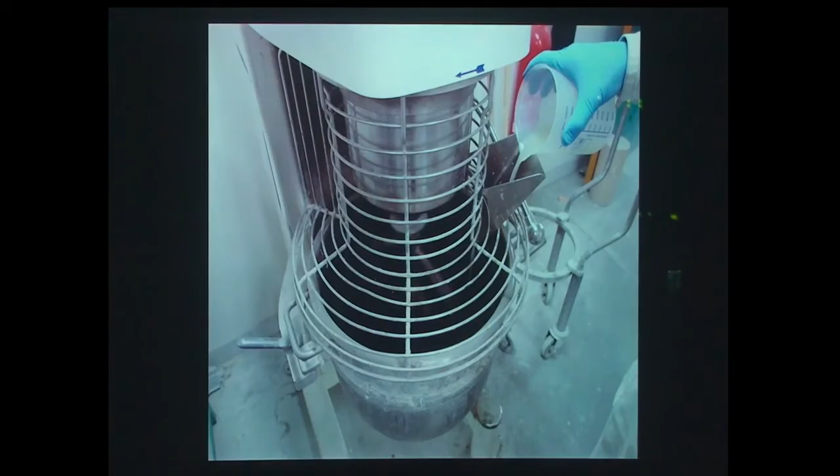So it gave birth to this, and to this very rough prototype made of fiber reinforced concrete. In fact, you assemble the cells in the way you want, and you obtain different concrete lattices. We worked on that in partnership with the Lafarge team, and ultimately we wanted to achieve this kind of component, but based on a voxelized strategy.

So you will ask, okay, why doing this? Why are you looking for this kind of light frame, I mean lightweight structure?

I'm not really an ecologist. Let's say, or either I am one, or I am not an ecologist, or I am a really radical one, because in fact I would love to have all the wild animals everywhere around, etc. So, in fact, I don't like parks. I don't like gardens. I don't like all the flowers that are selected. I just like nature. I would just love to be surrounded by wilderness, wild animals and trees and things like that. I never go in parks. I have never visited any parks in Paris. I'm living there for 20 years. I find this really boring, actually.

So this is why it's difficult, but if I am an ecologist, it might be a radical ecology proponent. In any case, if you look at these numbers, at these figures, it's quite shocking.

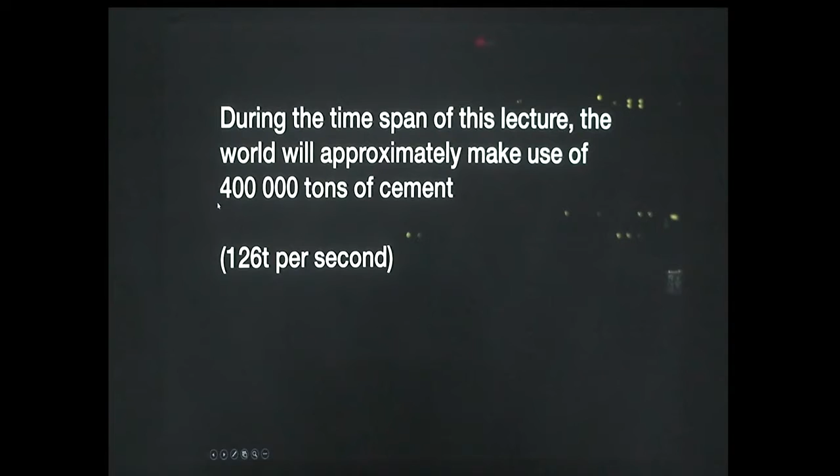And during this lecture, we will approximately make use of 400,000 tons of cement, which is 126 tons per second. So in fact, if in the 60s, making this kind of architecture was a matter of fanciness, it was really about style. At the moment, we don't have any choice.

We cannot be in a stylistic approach of architecture anymore. Because when you build that, you have to keep in mind that in another part of the world, it might definitely kill some animals, at least, and more often some people. There's no innocence anymore. The age of innocence is definitely over, let's say. And I think that architects should think really seriously about that. Fanciness might be criminal at some point.

So we have no choice in trying to make things lighter. And it's not a matter of aesthetics. It's just a matter of survival at some point. Even if I don't agree also with this kind of apocalyptic scenario, but I cannot go into the detail about that now.

So anyway, in the past, many people tried to build a lightweight structure. Gaudi did that, but I don't like arches, I'm not such a naturalist. I much prefer this kind of work by Shukhov, for example, or this kind of space frame invented by Alexander Graham Bell, who, by the way, is also the inventor of the telephone. So this guy is really fascinating. He gave birth to two of the major inventions of the 20th century, actually.

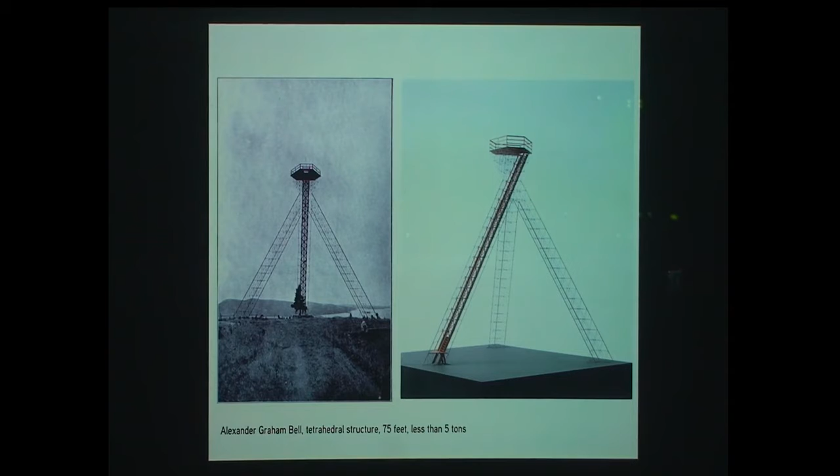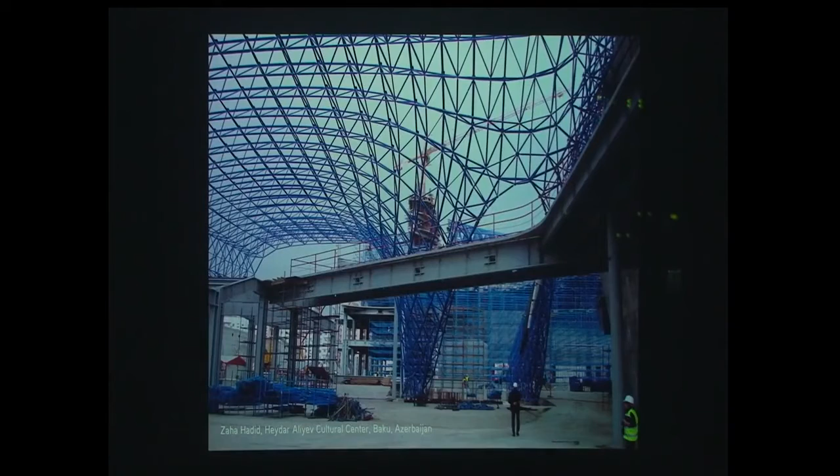In any case, this is what I'm interested in. But I want to do that not in steel, but with new materials, with concrete, for example. If I take a look at such a building, I'm much more interested in what is under the skin. It's a very Miesian approach of architecture at some point. It's very much about construction rather than about the way the architecture looks at the end. So I'm interested in that, but not in steel. I'm basically interested in this in a more advanced way.

So basically, I believe that the real challenge in architecture in terms of construction is to make the intrinsic geometrical and topological complexity associated with optimizations buildable.

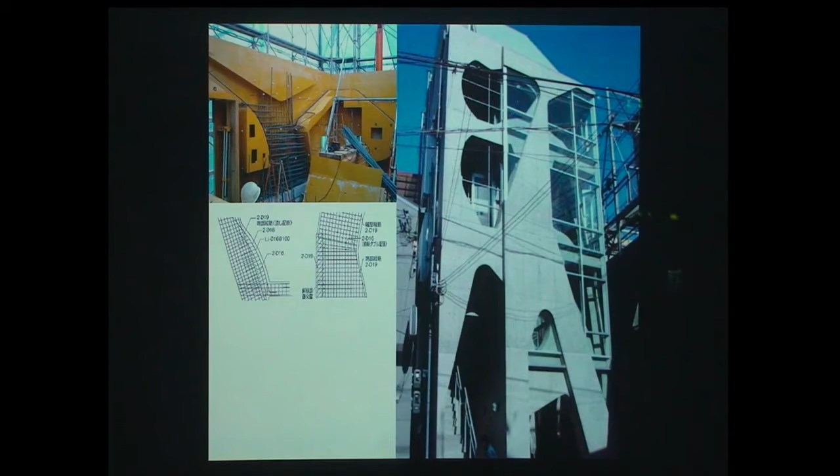For example, if you look at this genetic algorithm-based evolution strategy, first it's 2D, it's not really three-dimensional, but if you look at the mold, it's very classical, and then it starts to be super messy, and it's really craftsmanship, actually. You can't do anything out of that. Even if the end result is quite beautiful, in terms of process, I'm not really happy with this.

So we started to investigate the use of 3D printed sand casting techniques slightly before sand printing was made very famous by Benjamin Dillenburger and Michael Hansmeyer, and we were interested again not in terms of, let's say, skin or pattern, but more in terms of construction.

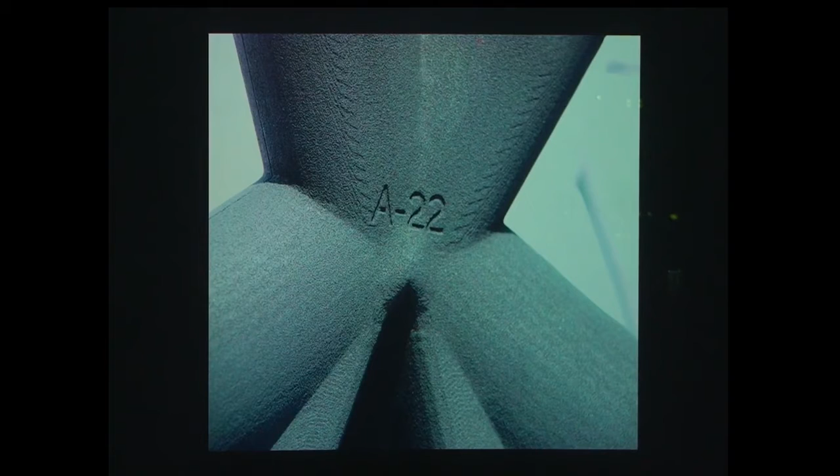So we use this for lost mold approaches, with all the pieces numbered, and we produced what we believed to be so far probably the first lightweight three-dimensional high-performance concrete lattice. It's made of Ductal, which is a Lafarge product, a high-performance concrete that's also fiber reinforced, with metallic fibers into it.

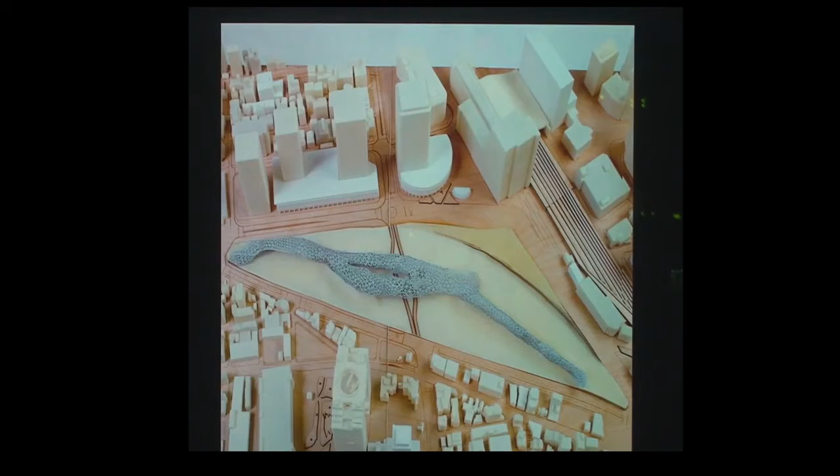We are lucky enough that this piece was later bought by the Centre Pompidou. We made a couple of projects about that. This was a competition for Osaka, revisiting the gigantic megastructure of Japanese architecture, but making it super light, as a super light one kilometer long space frame, which wouldn't be obviously regular.

So at the office, with some student interns and young engineers like Romain Duballet here, we are also developing interesting strategies to produce lattices in an automated way.

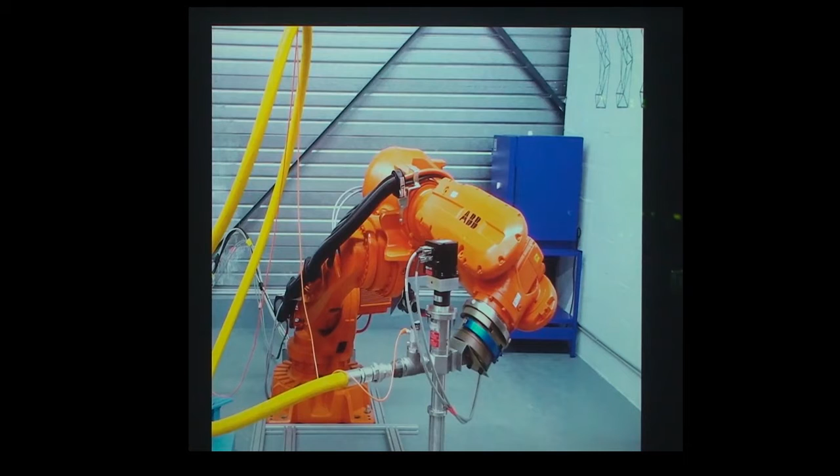Finally, recently, because I wanted to make sure that we could manufacture these things, and I was not happy with the existing technologies available on the market, we decided to create a company called XtreeE, entirely dedicated to the making of such complex geometries. So we bought the robots and everything, and we try to work in a rigorous way with our partners, especially in the robotic and material industry, for example Lafarge Holcim, but also in the software industry, because we are now supported by Dassault Systèmes.

So what you can see on the right here is a 3D printed element in concrete. The quality of the concrete is so great that you cannot even identify the layering when you cut the part, so you have to put a mark in order to remember in which direction it was cut. We made a couple of analyses about that.

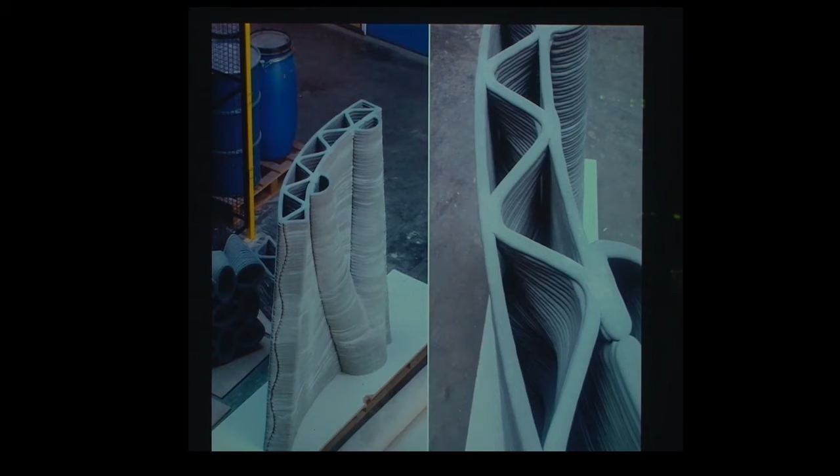This is not printed with standard concrete, but with high performance concrete. For those of you at ease with these numbers, just for your information, it's a 110 or 120 megapascal compression. It can stand for 120 MPa in compression, which makes it obviously a super high performance concrete. So these were the pieces presented in a show, and this gives you an idea of their scale.

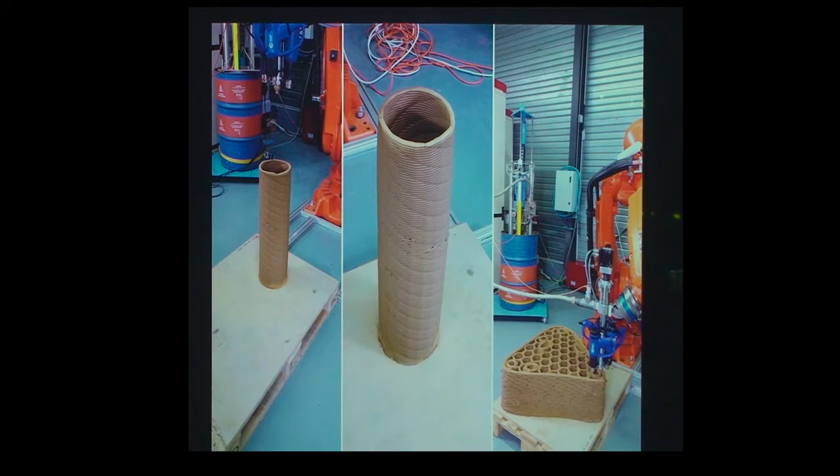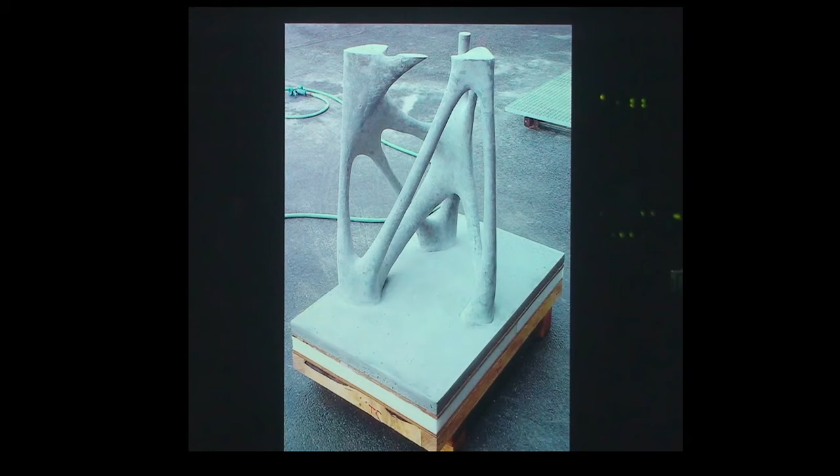We are also printing clay, and we use the clay printing as a strategy to create ecological molds, because then you can just remove the clay. I don't have to go deep into that because you can just look at the video on the website. You remove the clay, which is not cooked, with water, and after removing the clay you obtain this kind of component in concrete. And you can reuse and reuse and reuse again the clay. So I believe it's kind of an interesting approach, and obviously we keep investigating those things.

So let's jump to the theory, and forgive me in advance if I will be a bit fast about that. In fact, I believe that even when I try, I cannot separate practice and theory. I believe architecture is about both, even if sometimes it's very difficult to deal with both aspects of that.

Recently I haven't been so satisfied about the theory produced in the discipline of architecture. Let me first explain one word: when I use the word computationalism, I'm not speaking about what happens in cognitive science. It has nothing to do with cognitive science, I just wanted to make this clear. Because what happens in cognitive science when they speak about computationalism is in fact very much metaphysical. It's just a hypothesis, and we don't know very much about that. It's just an analogy between the human mind, the brain, and the information processing system, which in fact is a computer. So I'm not very much into that.

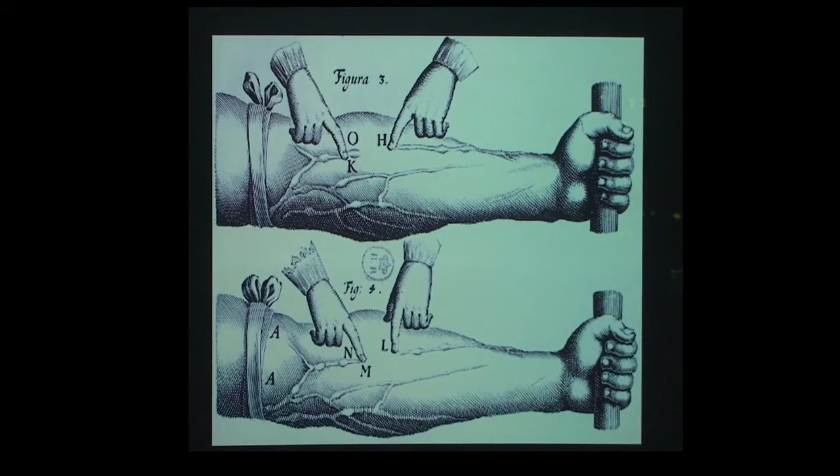But in fact, these analogies are quite old, and this is precisely why I'm not that much interested in this. From Descartes, 1637, until today, we are always in this kind of analogy between the machine and the human body. Even in the discipline of architecture, if you look at Diller and Scofidio's Slow House project, for example, this is very clear.

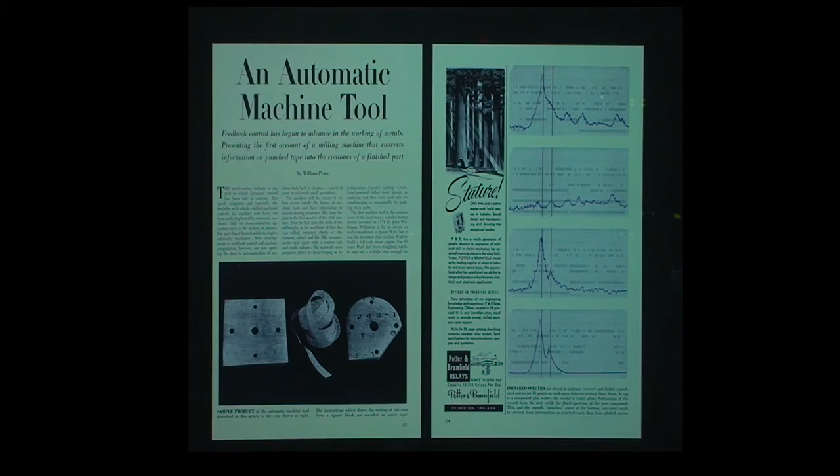If you look at the work of Bernard Cache and Patrick Beaucé, you start to see a different path, taken with an analogy which is less visible. But still, this is very much vitalist as an approach, and I'm not very much interested in that. So in any case, I'm interested in understanding a bit more what happens with the advent of all these technologies.

Greg Lynn opened the path about that. And with Bernard Cache, I spoke, for example, about the non-standard product, and it was made very famous with the exhibition Architecture Non-Standard in Paris.

But as far as I know, the first guy who spoke about non-standardization is really Marshall McLuhan. He wrote in 1969: 'When electronically controlled devices are perfected, it will be almost as simple and cheap to obtain one million different objects as to make one million identical ones.' So, according to me, he was a real pioneer about this concept of non-standardization, even if people like Greg Lynn developed it further.

But if you look at the discourse of Greg or Bernard Cache, etc., again, it's a bit too vitalist. These are images from the end of the 19th century, or rather the middle of the 19th century, with Grandville. You see this kind of metaphysical interpretation of the fact that everything is just an evolution of everything else. And this kind of drawing was later used, much later, about 60 years later, by D'Arcy Thompson.

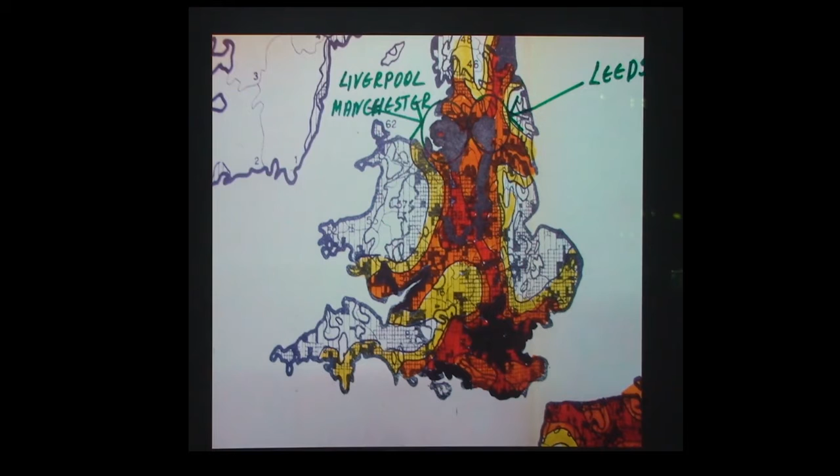And I believe it's a fundamental difference because data are really key today. But if you go back, you see that some underestimated architects like Konstantinos Doxiadis were already using this. For example, this project for the planification of the UK was done by Doxiadis in '65, and it was already using a computer—a Univac 1107 produced by the Sperry Rand Corporation—which was one of the most powerful computers in the world, one among the 30 most powerful computing machines in the world, which is very significant.

Just imagine today that, for example, OMA or other big architecture offices would have one of the 30 most powerful computing environments existing in the world. It would be something probably similar to some of the very big banks like Deutsche Bank or UBS. It would be really awesome and extremely radical. This is why I'm also very much interested in Doxiadis, because it's unbelievable how you can underestimate the importance of such an architect and theoretician.

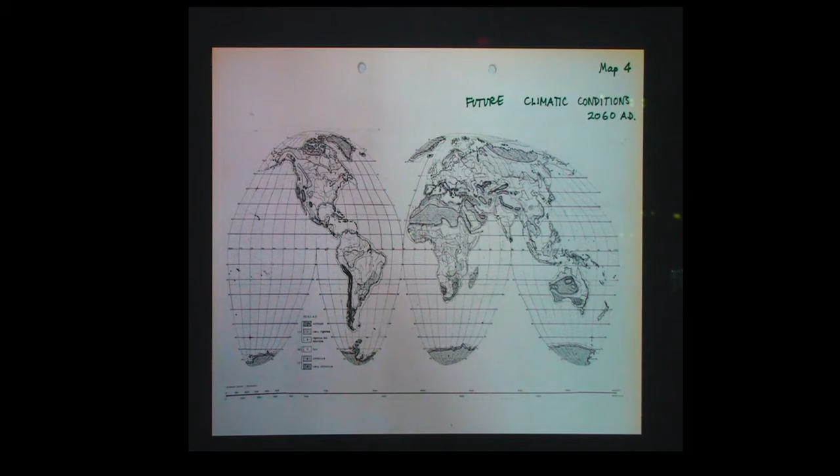And we are nowadays speaking about global warming. So if we speak about who is an avant-garde architect, obviously Doxiadis was an avant-garde architect. He also addressed the issue of civilization at large by proposing a new interpretation of Toynbee, and also he developed the issue of migration, which is also a very crucial issue of today.

So anyway, the situation we are living in is that one. But when we look at some discourse, what we see is this, the generic city by Rem, and more recently the Fundamentals exhibition in Venice, which is about floor, wall, ceiling, roof.

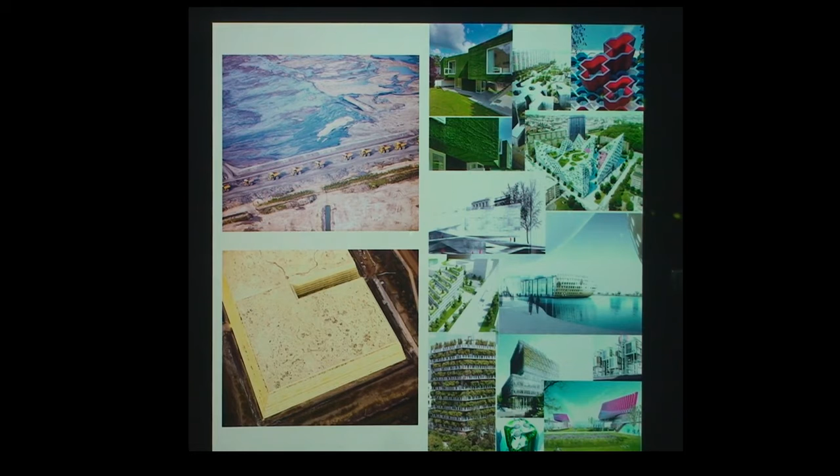I can't understand that, because I had the feeling that what was so amazingly important in architecture were science, capitalism, energy, ideology, geopolitics, and even pollution. I didn't have the feeling that stairs were such a big deal in the history of architecture. So it makes me really depressed when I see this kind of old-fashioned discourse entering again the discipline of architecture.

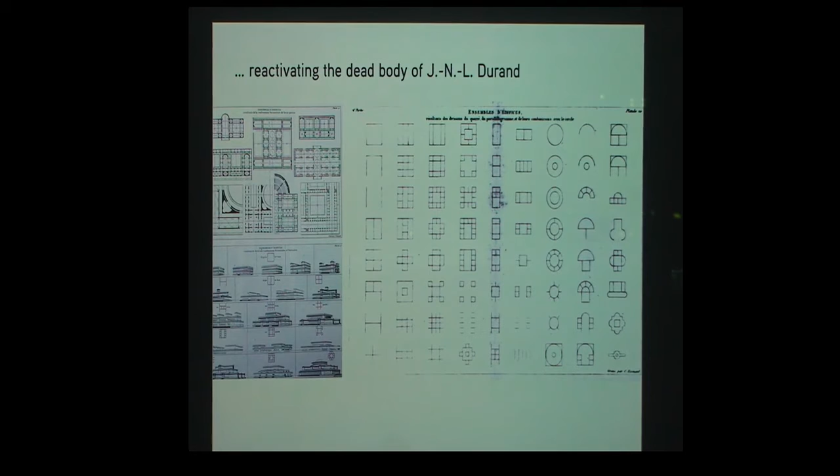It's really like reactivating the dead body of Durand. Everything is static. But at some point, it was also the problem of modernism, while in fact we know that nothing is static, everything evolves. We have already committed hundreds or even thousands of mistakes, and we start to do it again.

For me, it's like if Rem hadn't read this book from Peter Blake. Yeah, I don't get it anyway.

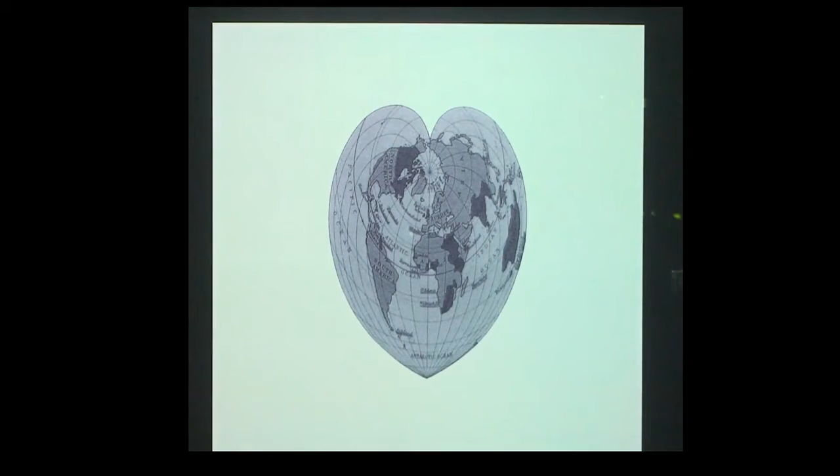If I look at this propaganda map of the British Empire, inviting people to love the British Empire, we know that it doesn't work. Not all people like empires. And in fact, on a global scale, we have the feeling, and this is what I will explain, that we are entering this kind of nihilistic time in Western history.

I would say again, because also at the end of the 19th century, this feeling of entering a nihilist period already appeared, and you can easily consider this by reading Nietzsche or Dostoevsky, but also many other people. In any case, I consider this a fundamental law: in social life nothing stays rigid or final, and nothing ever will. So I don't want to define architecture in terms of fundamentals, even if it's a bit fancy to do it at the moment.

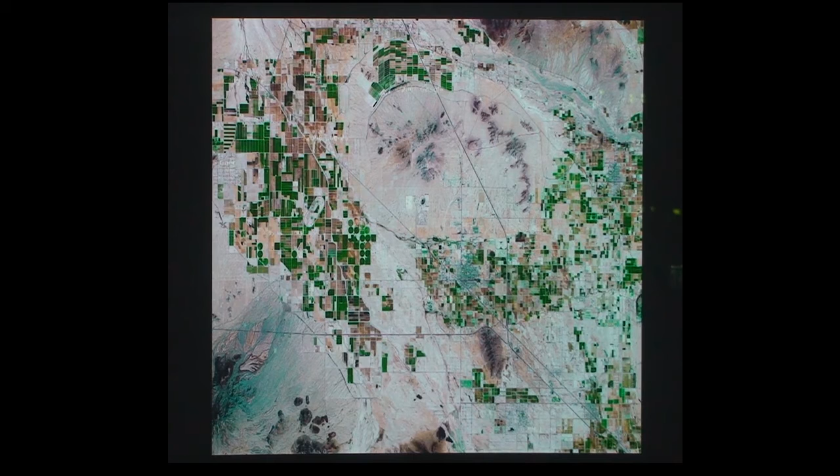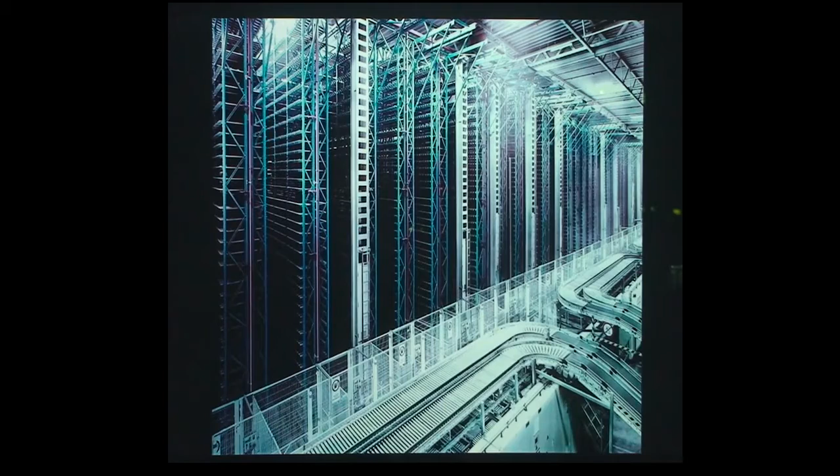Because we have the feeling that we cannot act anymore on anything, we have this feeling or temptation of going into nihilism again. And when we look at that, we don't know what to do, actually. We have the feeling that nothing can be done. This makes the situation very difficult in terms of architectural theory, because many architects feel they can have reformist approaches, and I absolutely don't believe that we can reform any kind of system at the moment. It has gone too far, and the roots of that are really deep.

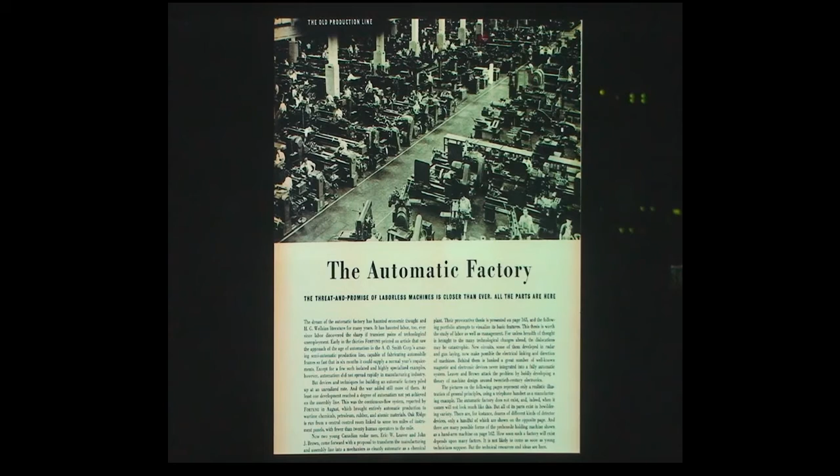As soon as the 1950s, the automatic factory, for example, was already well set conceptually. All the elements of an automatic factory were present, and this is what we know today with all the sensors mounted onto robots. Machines without men were already a reality. And in fact, the deep relationship between this automation and the wish of the white collars to destroy any form of revolt or strikes by the blue collar were already present.

So this idea of autonomy, in fact, is not new. It's deep. We all believe that it will, let's say, save the world.

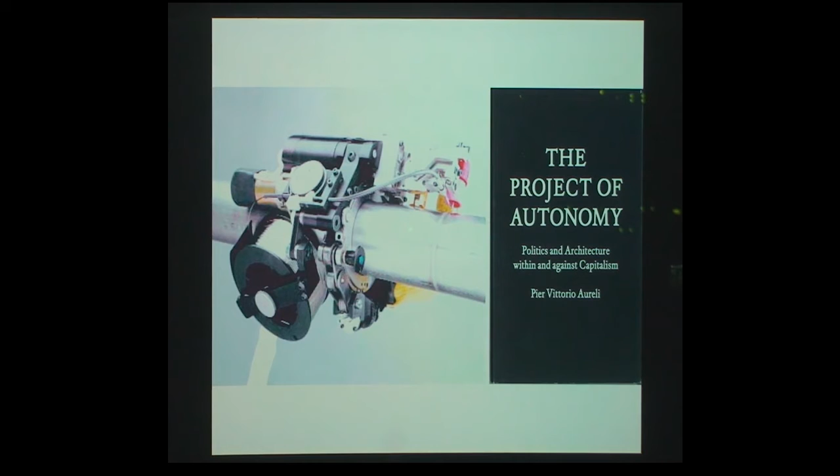So the project of autonomy is something that's been conceptually treated, for example, by Pier Vittorio Aureli in the discipline of architecture, but according to me, we are speaking about a fundamentally different concept of autonomy. And I would love to see, in the work of Pier Vittorio, some sort of almost Hegelian dialectic between these two different concepts of autonomy. Because if you look only at one side of the coin, you just forget almost everything about the world as it is at the moment, and you go into a super idealistic architectural discourse, which I believe is a great mistake for architecture.

You need to consider the issue of productivity behind this, and capitalism as well—the issue of labor, what happens with the machines, with the computer in the business world, and what is the true reality of work, especially in the finance industry.

If you go back in the literature, you will read, for example, in 1934 by Thomas Watson, who was the founder of IBM, a very interesting series of essays and hypotheses about the future of the finance industry—not especially the finance industry, but the fact that any kind of work and any kind of company will be replaced by another layer which is purely financial at some point. And it doesn't matter what you are producing; what matters is only the number of computers you have at some point.

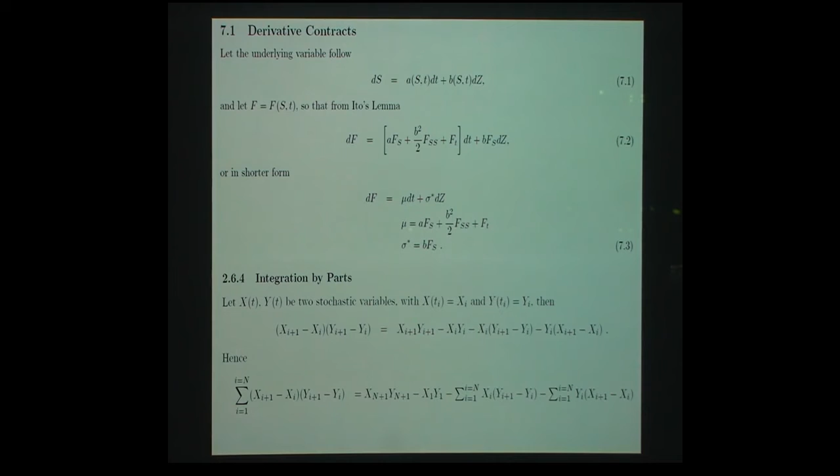This is based on the work by Bachelier, who invented financial mathematics at the very beginning of the 20th century. By the way, he was a student of Poincaré—he made a PhD with Poincaré—and it gave birth to what we now know as derivatives products. So all this world is what we are living in.

Some people say, yeah, maybe we can change this—architecture can, maybe we can produce some sort of alternative architecture. Let's take the example of the market: maybe we should regulate the market. This is easy politics, in a sense, because objectively speaking, it just doesn't work. If you look at all the conditions for this kind of discourse, you cannot find any solution.

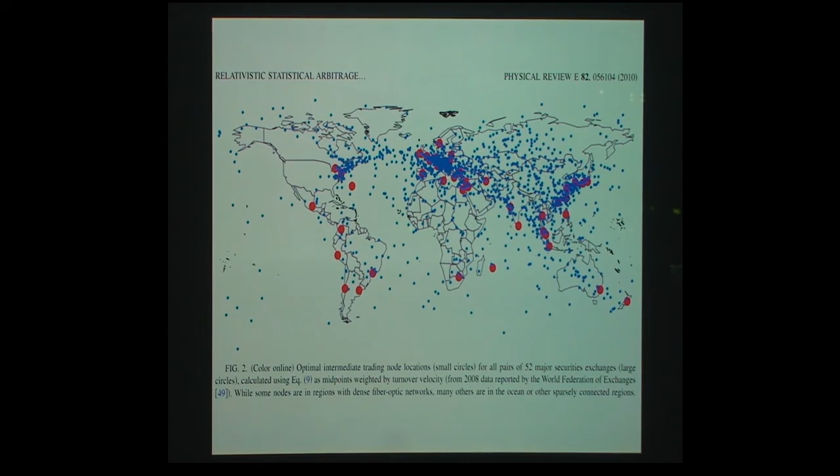You can make use of geography in order to make more money. This map, for example, shows the optimal location of the stock exchange that should be created on Earth. And then you see that some of them are in the middle of nowhere in the ocean, which is also something quite fascinating.

In any case, we have entered a world in which you have on one side mathematics, and on another side, let's say, politics, which is useless, which cannot control anything, and which gives you the illusion that you can do something, which in fact is absolutely not true.

So we enter this situation. It's a kind of reversal of Marx's quote, actually. In Marx, logic is the money of the mind, and I would say that today computation is the mind of the money. And we enter this kind of unlimited capitalism. The deeper we go into the matter, the more powerful the computers are, the more powerful and deeper capitalism is as well. It's really this kind of almost fundamental law of capitalism, actually.

So, in fact, some people in the 60s, like Paul Virilio, Jean Baudrillard, they started to understand this a bit more. They went back to more abstract notions of computers, but they treated this on a cultural level. So what I'm doing in my work at the moment is this: trying to understand these roots.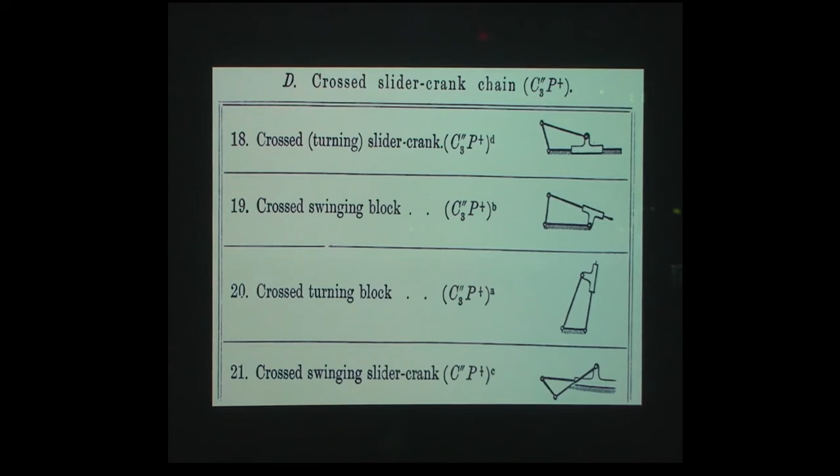And later on, Poincaré said that it seems there is nothing in mathematics which cannot be reduced to algebra. So if you add these conceptual roots from the 19th century, the more mathematical, philosophical roots from the 17th and 18th century, and then the technical and technological progress from the 20th century, we are moving into a context that we can only consider as computational.

So this is why, for me, in such a context, which I consider purely computational, we need some theory for that. And computationalism is the name I choose to use, actually, in order to describe this shift.

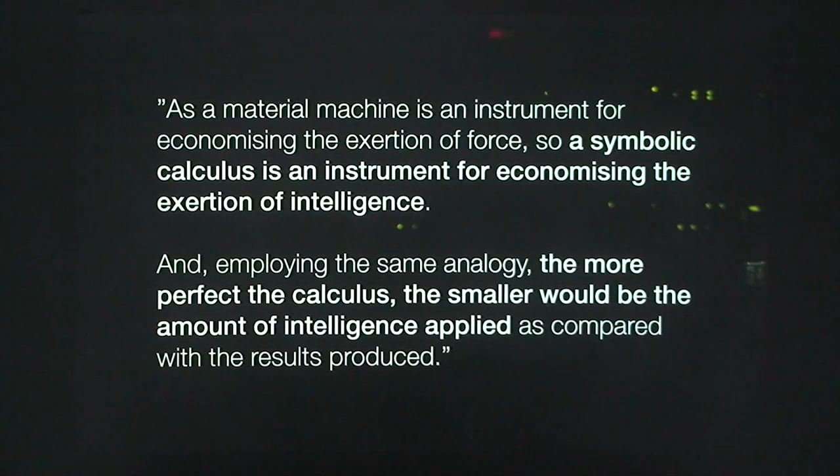As William Ernest Johnson, more or less at the same time, wrote in the Logical Calculus General Principles: as a material machine is an instrument for economizing the exertion of force, so a symbolic calculus is an instrument for economizing the exertion of intelligence. And employing the same analogy, the more perfect the calculus, the smaller would be the amount of intelligence applied as compared with the results produced.

So, in fact, if we look at that, I end up with this kind of logical consequence. What is computationalism? It's nothing else than arguing up to the last confine of logic of planetary computation. And if I start to have some sort of logical reasoning, almost like a mathematician, then what do we discover? There's no need for articulated discourses.

As Franck Varenne says, simulation is neither a discourse nor a language. Discourse is replaced by a planetary white noise. This is my own expression. I called what is happening now on the social networks, etc., a planetary white noise. No need for cleverness, it's replaced by computational speed and brute force, or artificial intelligence algorithms. No need for thinking. The more perfect the calculus, the smaller the amount of intelligence needed.

So if there's no need for anything, what is left, ultimately? I would say there's only two things which remain. On one side, for the non-believer, pure conceptual thinking, science for the non-believers, even if at some point science is also some sort of belief, and religion. And if the science of calculation ultimately governs, because this is what Babbage was saying, that the science of calculation should ultimately govern, not politicians, so no more politics ever, according to which system of value.